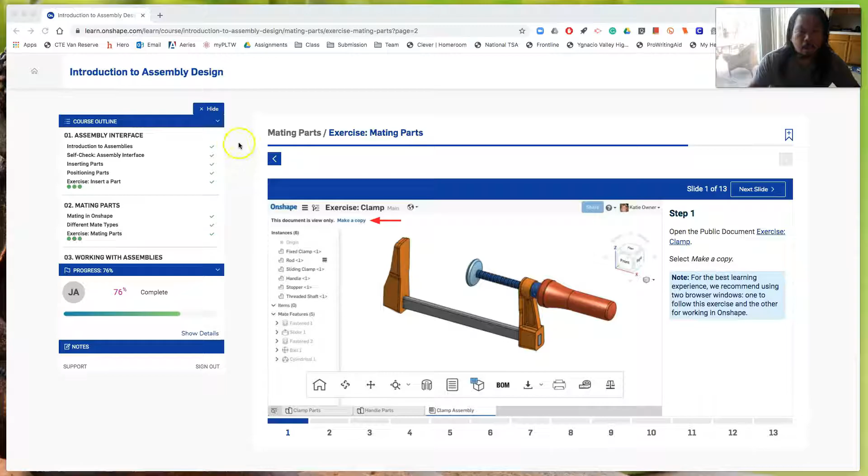Okay, so this lesson for today focuses on mating parts. In Autodesk Inventor, we call them constraints. Here in Onshape, it is so much easier than the way we did it before. There is a feature in Autodesk Inventor known as joints that is similar to this, and that's what they actually use for making assemblies.

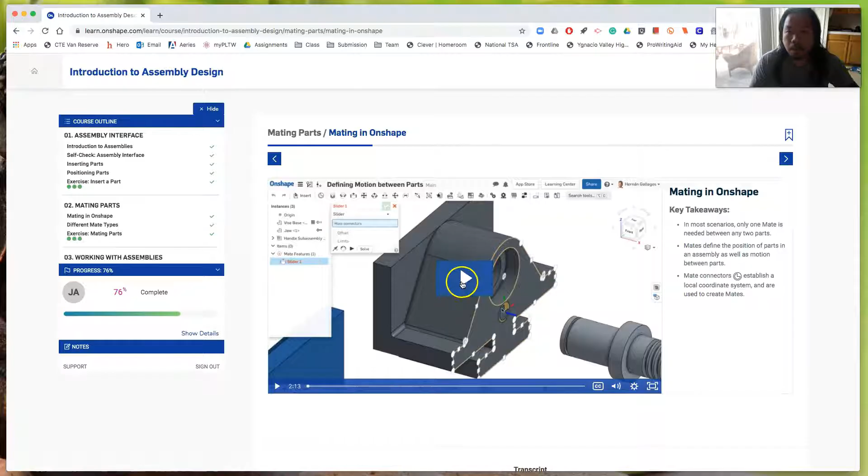So we've done all of these before. Now we're on number 2, mating parts. So first watch the videos. This will prove beneficial for you guys while you do the tutorial with me. And then also watch different mate types. And after you've done that, now go to the exercise mating parts.

Okay, so we are supposed to create an assembly with the parts from different part studios, and this is how it looks like. And then we're adding limits to mate so that the movement is constrained. It doesn't go past where it shouldn't.

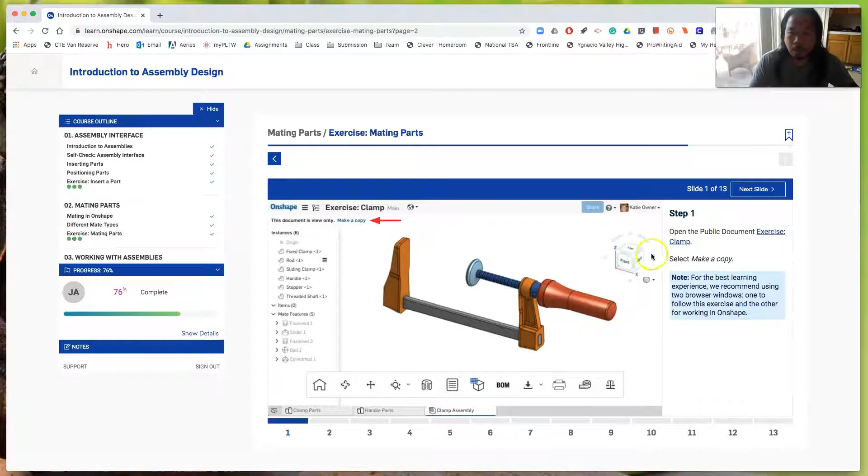Okay, so click on the next page. It says here, open the public document. So click here. And at this point, let's split the screen.

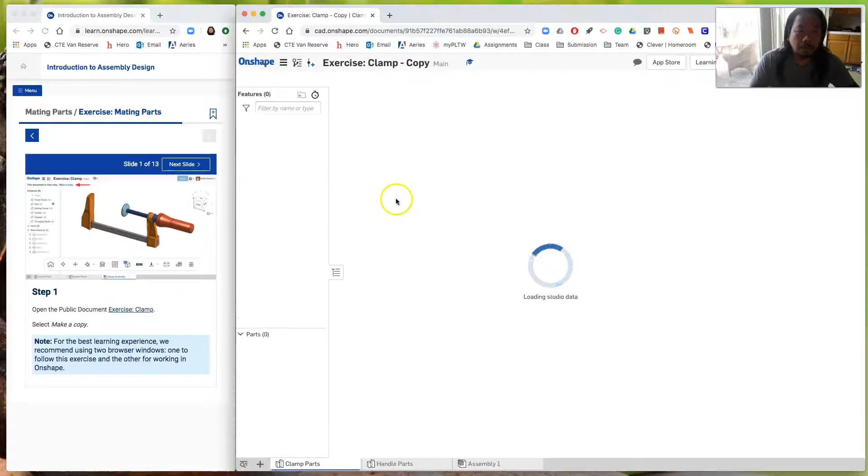And then what you need to do now is make a copy. So just leave it as such, exercise clamp copy. Click OK. And then the next slide says, navigate to the assembly tab, which is down here. And then right click on the tab to rename it. So right click, rename, and then we'll call it clamp assembly.

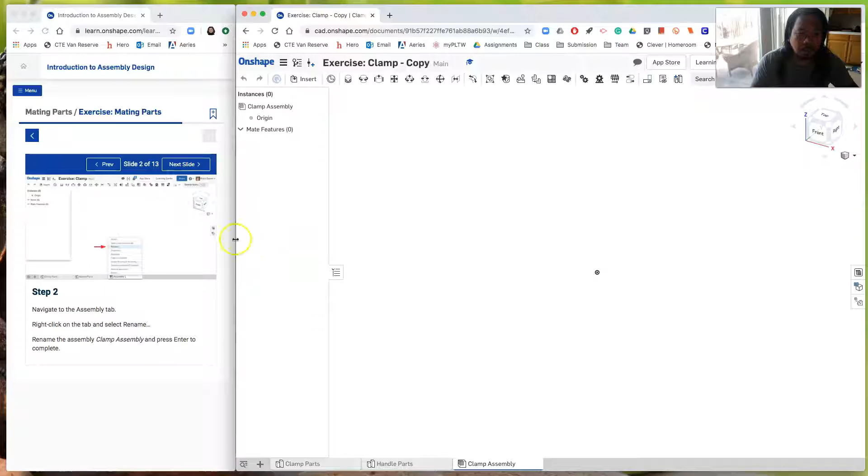And then click on it. And now we're going to start off with an empty graphics window. Okay, so first insert the parts from the clamp parts studio.

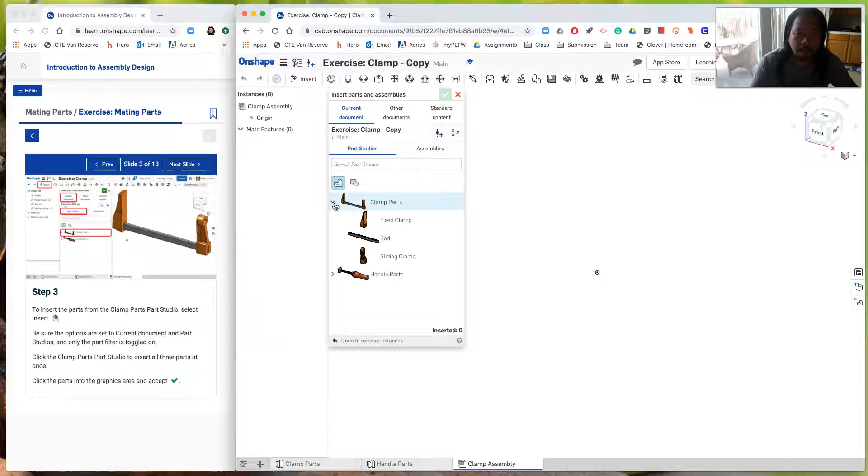So insert, and then there's two. There's clamp parts and then there's handle parts. And if you click here, the clamp parts, there's 3 different parts there. And handle parts, there's 3. So just click on clamp parts for now. And so as you can see, it's in the graphics window now. Just click on it so it gets dropped there, and then click on the check mark.

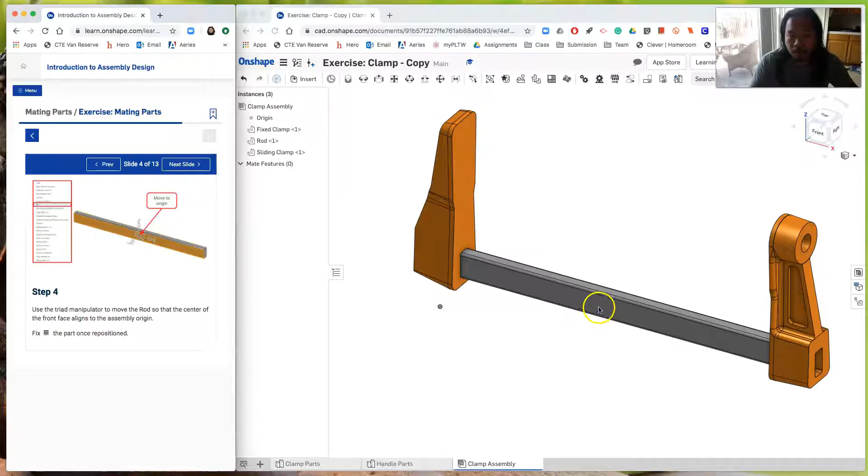Okay, next slide. We need to look for the triad manipulator on the rod. So there's 3 parts here. There's the fixed end, there's the sliding end, and then there's this rod. So click on the rod and then click one more time, and then you'll actually see the triad manipulator.

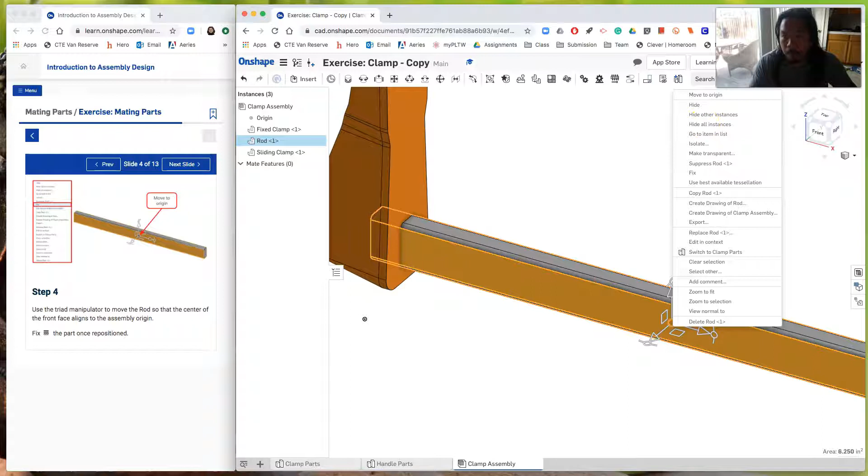There you go. And then once it's done there, right click on any part of the rod and then say fix. Okay, so now this won't move. Okay, so there's that grounded icon.

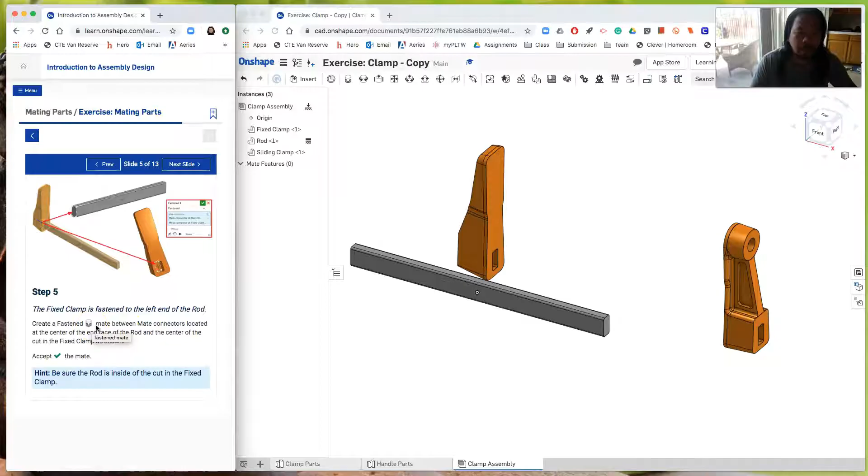So next slide, we are to put constraints now. Okay, and the first one that we're going to put is called a fastened mate. Okay, or not constraints, but they call it mate. So we're going to do a fastened mate, and the fastened mate, it's like gluing them together and they're not going to move at all. The 2 parts aren't going to move at all. So this is the fastened mate right here.

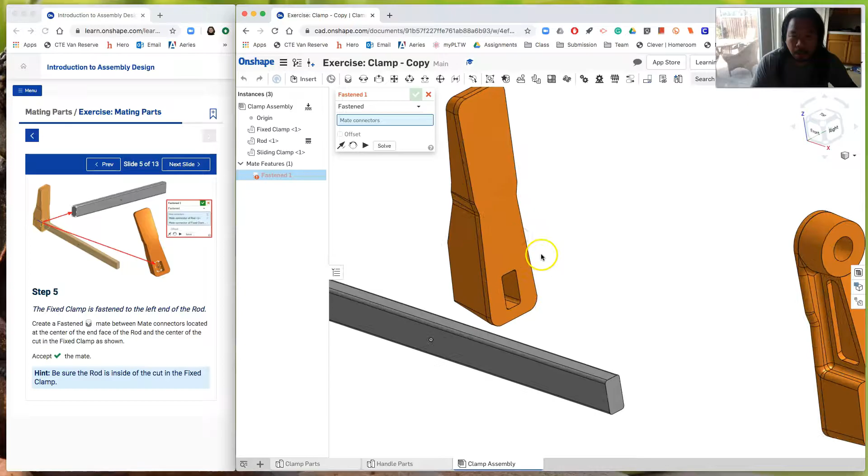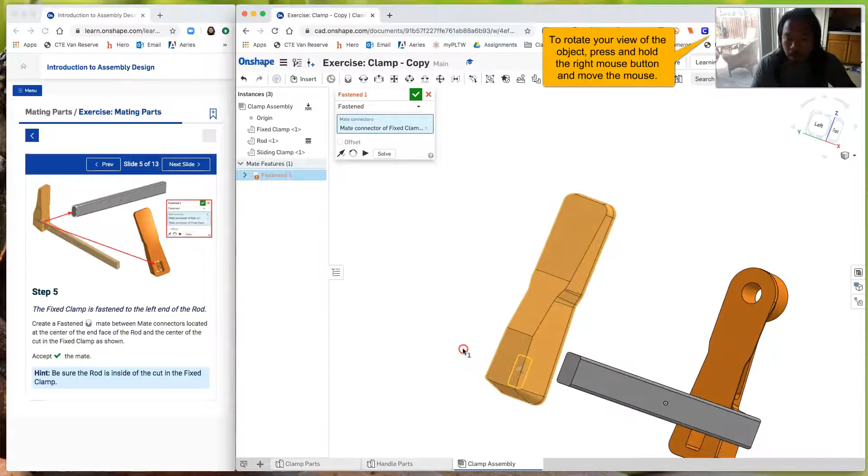And if you leave your mouse there, you'll actually see instructions on what you have to do. Okay, but it's simple. Just click, and then we are going to fasten this fixed end, and then try to go inside and then get that center of that rectangle from the inside. Okay, so right there, click there, and then right at the end, and I'm just right clicking and then pressing the right button and then moving it around to move around. Okay, and then right here, click there.

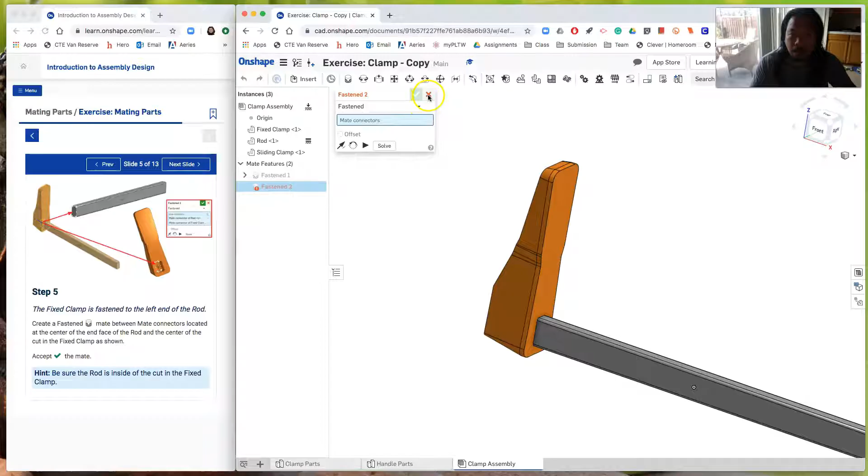Okay, and then you could solve it, or you could just click check. Okay, and then you will end up having this. It's assuming that you're going to do another fasten, but we're not, so just hit the X there. So as you can see, now if I try to drag this, it won't move. This one's grounded and this one is fixed to the rod, so it won't move at all.

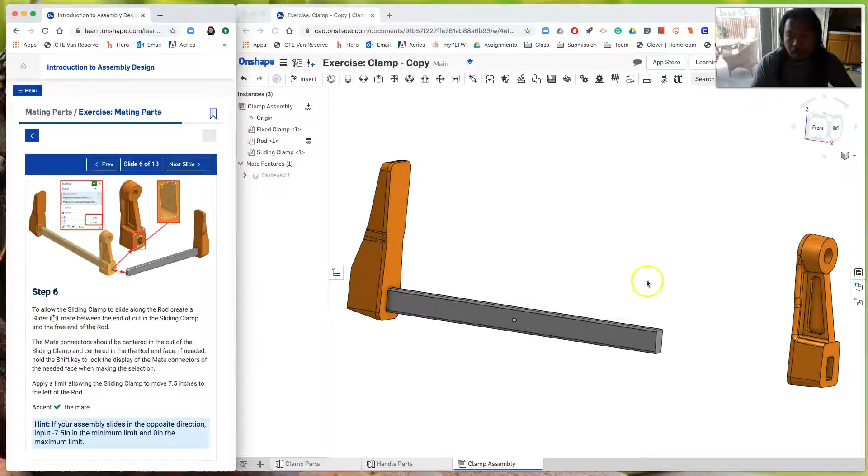Okay, so next, right click, zoom to fit. The next one is we're gonna put a sliding, a slider mate onto this too. Okay, the slider mate is this one. Okay, so click on the slider mate and then click here, this part of the rod.

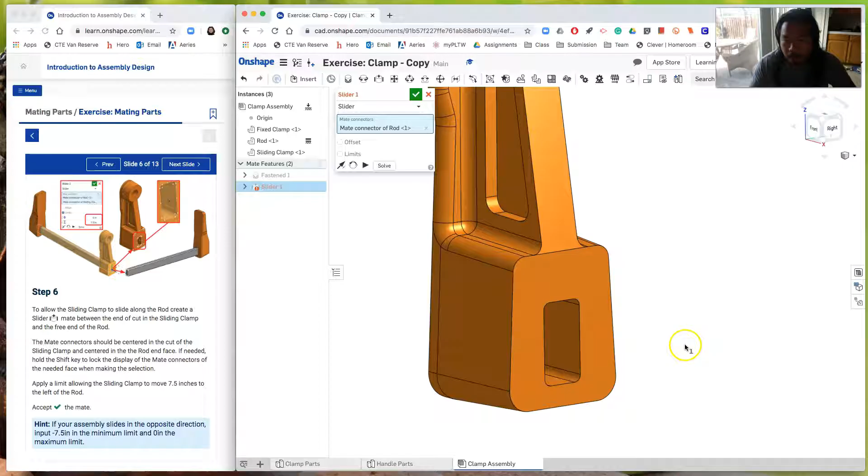Okay, and then right here, I'm just gonna look for this, the center of this rectangular hole right there, and then click check. Okay, so that solves it. And as you can see, it's there and it's supposed to slide. So let me zoom to fit. It's supposed to slide. There you go.

It does slide. But look, it goes past it though. Okay, it goes past the fixed end and goes past this end. So we have to do some edits on this one, and this is what we call as limits.

Okay, so the first limit that we have to put is, let's put 0 and let's see what happens. Okay, and let's try to click check and let's see what happens when it's 0. So there's that stop, so no movement to the end of the rod, but now we still have that problem.

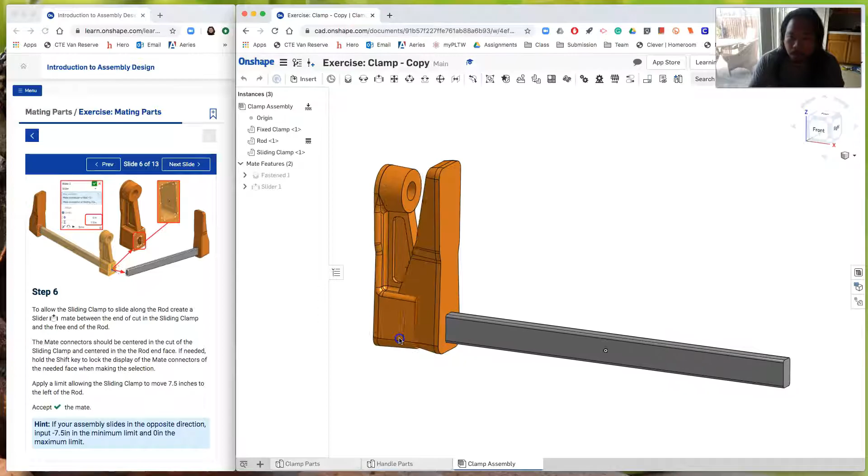Okay, so let's right click on the slider, edit. So 0, that means this and this, they're flush. Okay, and then we want the maximum travel to 7.5 inches. So type 7.5 and then check.

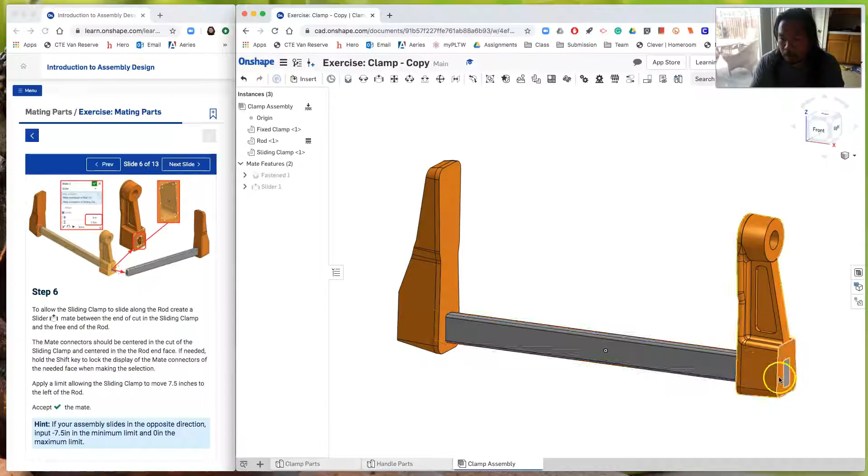So this end is going to travel 7.5 inches there. That's the maximum, so as you can see, it ends right there. So from here up to there is 7.5 inches.

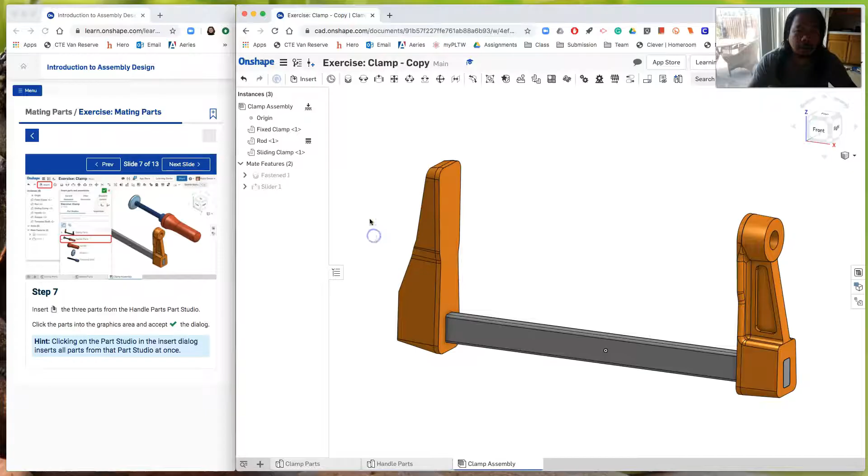Okay, so next, insert the 3 parts from the handle parts part studio. So insert, then current document, part studios, handle parts, then there it is, and then just click and check.

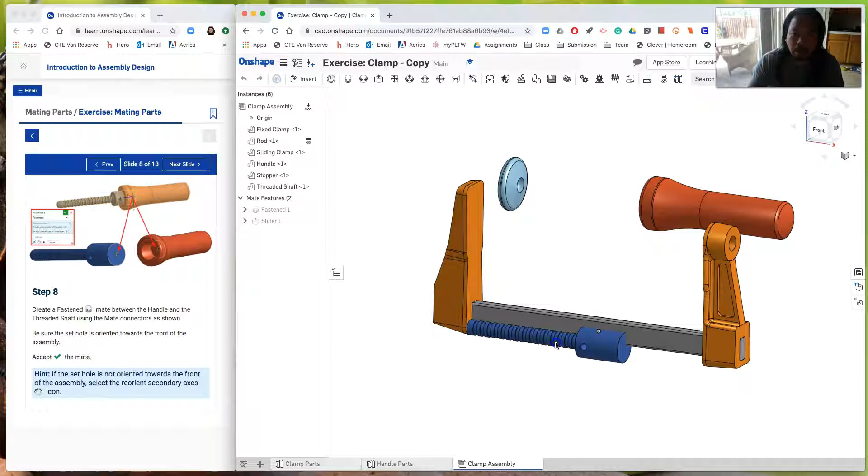Okay, next slide, we are supposed to separate these 3 components. First, we're supposed to put a fastened mate on the handle and also on this piece right here, the threaded part. So right here is the first one.

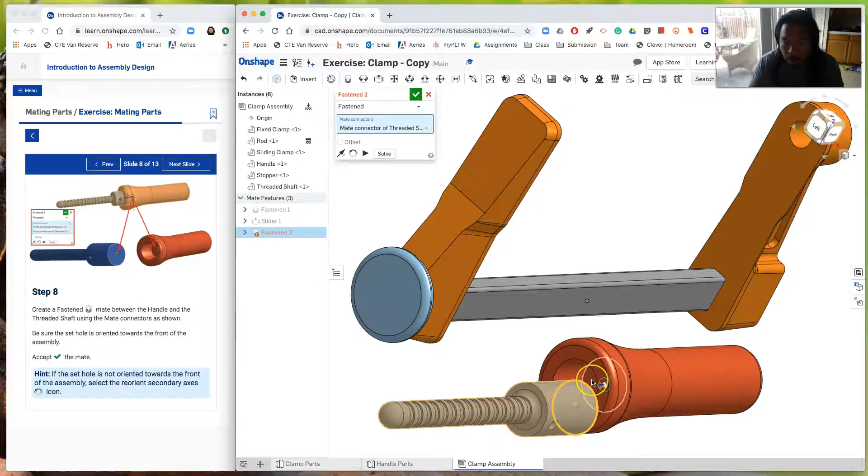I think I got that right there. Okay, so click check. So these 2 are together now, they're fastened.

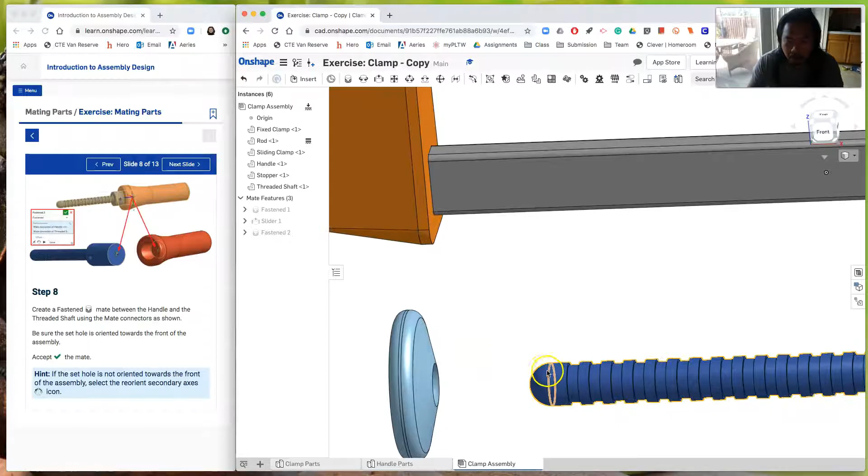And then this one, if you notice, this is a semicircle. So you got a concave end here, and then you have a convex end here. For this, it's called a ball and socket. So for your next one, we are going to put a ball mate.

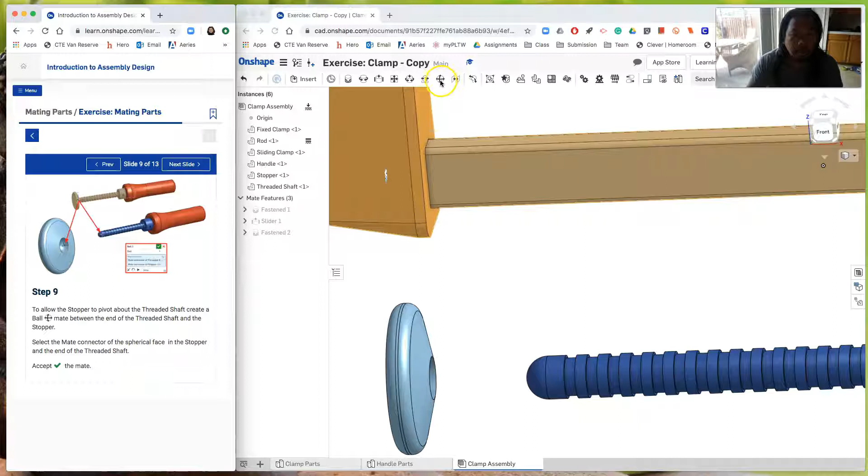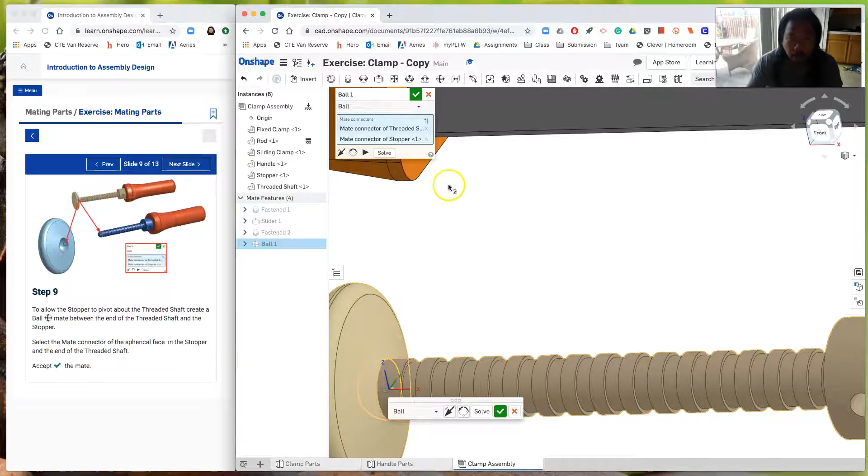Okay, so the ball mate is this one right here. So click on the ball mate and notice how I'm going to put it. You just have to select the tip of the ball right here, and then same thing here, the face, like so, and then hit check.

Okay, so the next part, you don't have to do it, because if I move this, everything moves together, including this one. But for you to actually see what it does, I'm going to fix this first.

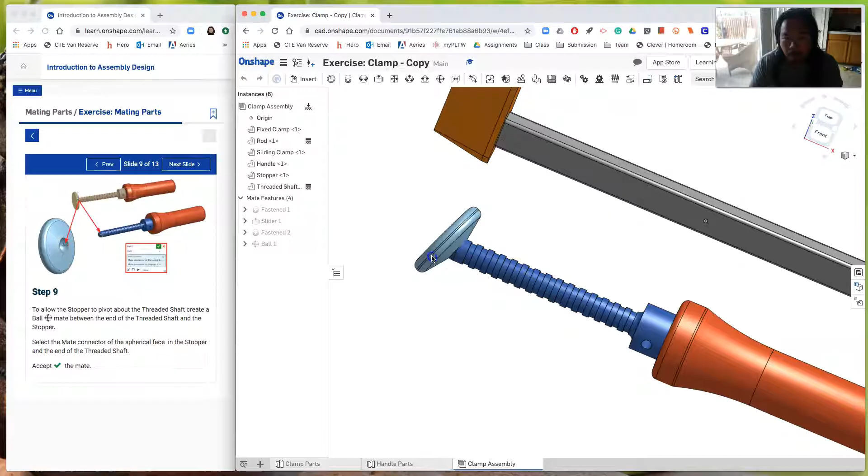So don't do this anymore. So this one's fixed, okay, so it can't move, but this one isn't. Here's the movement of the ball, so that's the movement of it.

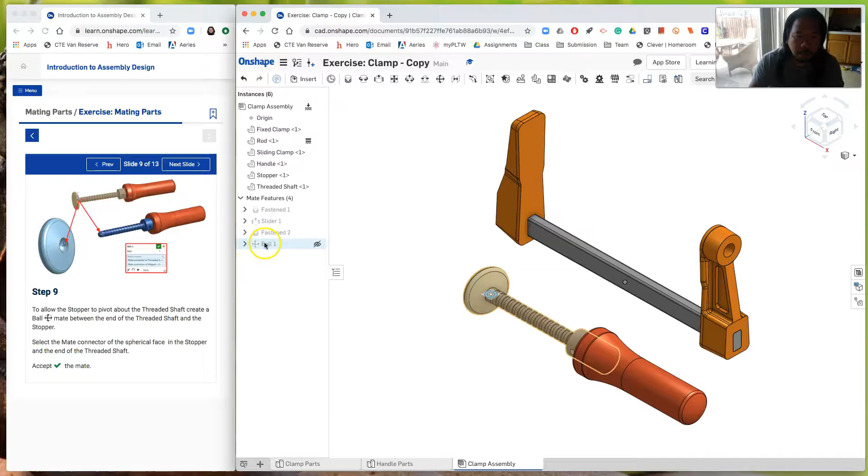Okay, so let me unfix this, and then let's go to the isometric view again. All right, okay, so there's the ball. I'm going to right click the ball here and say reset so that it's lined up nicely. Okay, so next slide.

Make the threaded shaft, this one, so it can slide and rotate with the cylindrical mate. And then we are putting it here. So if you look at the cylindrical mate, look at that. There's that arrow right there, and then there's that rotary arrows, which means it could go in and then it could also rotate in place.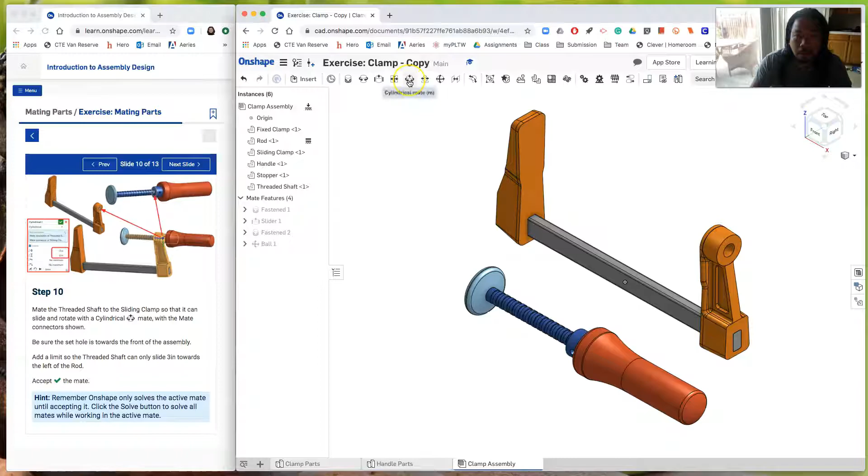So click on that. The first part would be, watch where I'm going to click. So here's that. Once you have these two circles highlighted, click. So we got that part right there.

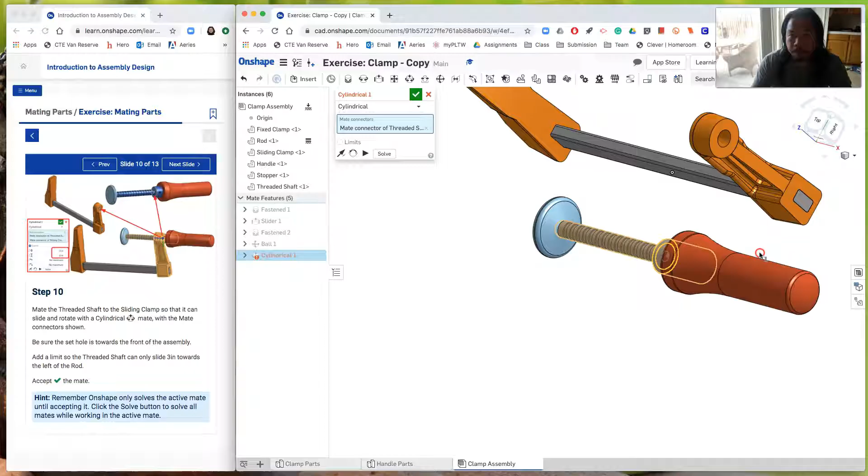And then on this part, it's this part of the circle, okay, the edge of the circle. Okay, let's click. There you go, okay.

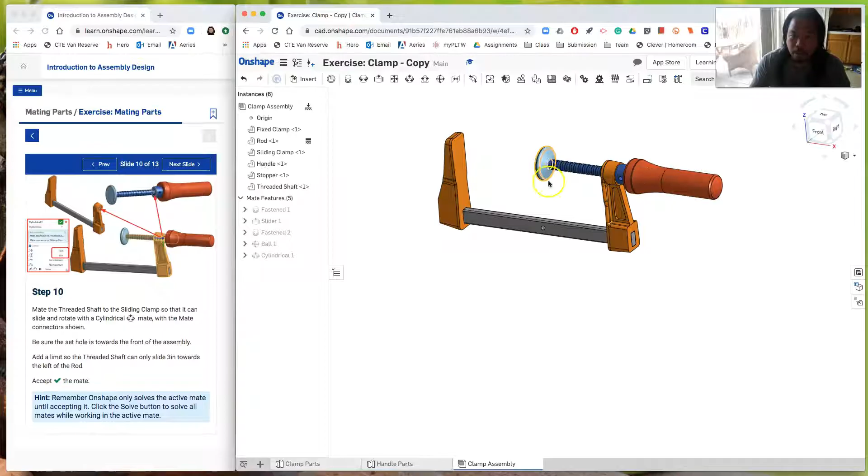So I was surprised there because it went there by itself, but these ones are fixed and this has a ball, so okay, so that worked. Okay, so let's see what it does now.

Watch what happens. Notice I could actually move it here, and then I could also watch this hole right there. I could also rotate it, okay? But then it goes past it though.

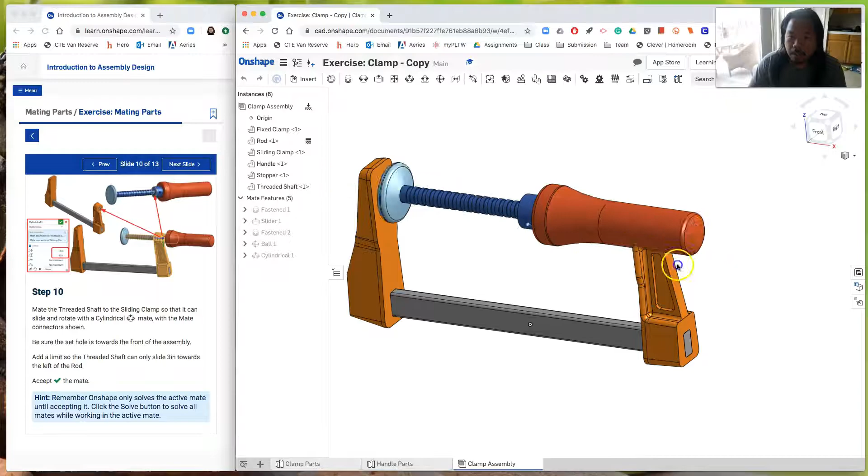Okay, so we need to modify the cylindrical. Click on edit, and then we need to click on some limits, okay? The first one is the maximum, okay? So let's put, what's a maximum? It's supposed to be 0, okay?

Let's click on that and let's see what happens. So see how that got connected there? So that's the maximum 0, and we should be able to pull it out.

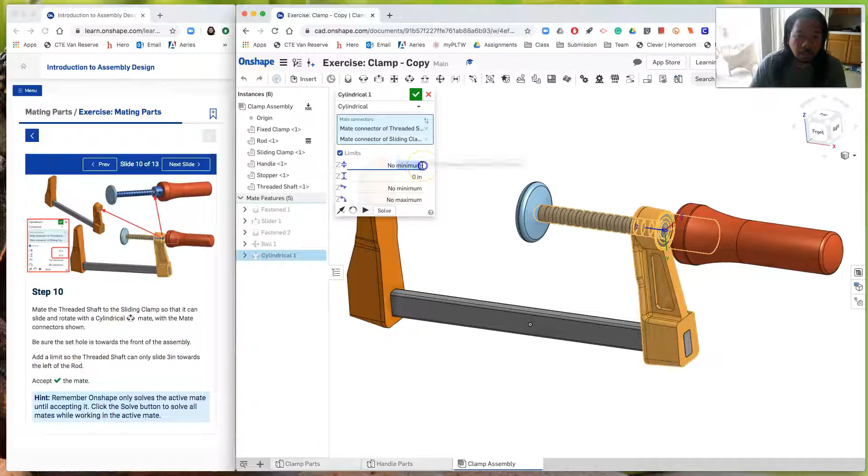And let's go click edit on the cylindrical again, and then this is supposed to be, it's going to the opposite direction, okay, to the right. So we're doing -3. This type of movement going inward is positive, but going out is the opposite, which is negative. So that's why we had to put -3.

So watch that. Okay, so there you go. So that's 0 inches, and then this is -3 inches.

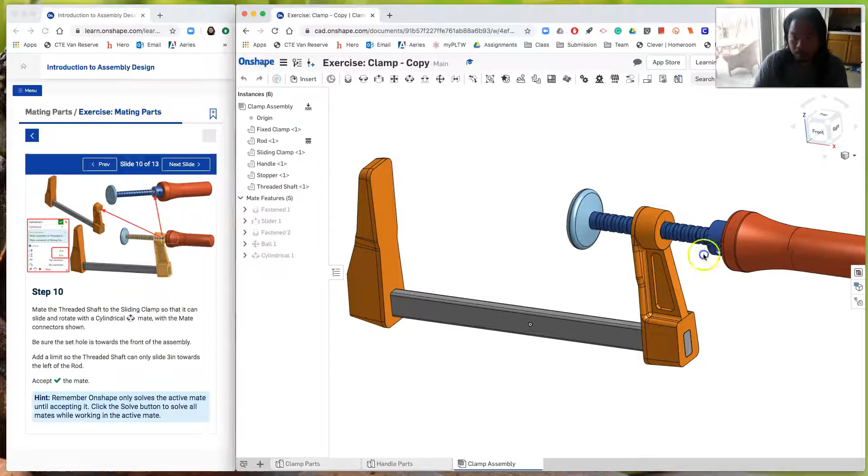Okay, next slide. Now let's try to drag the instances to see how they move. So if I click here and drag this, see how that passed through it, but then it drags that. Okay, so it works like a clamp. Cool, pretty neat.

So it doesn't slide there, but here. Okay, next. Now, you need to reset everything. After you're done playing it, you have to go click on the slider here, right click, and then reset it. Same thing with the ball, reset the ball, and then reset the cylindrical.

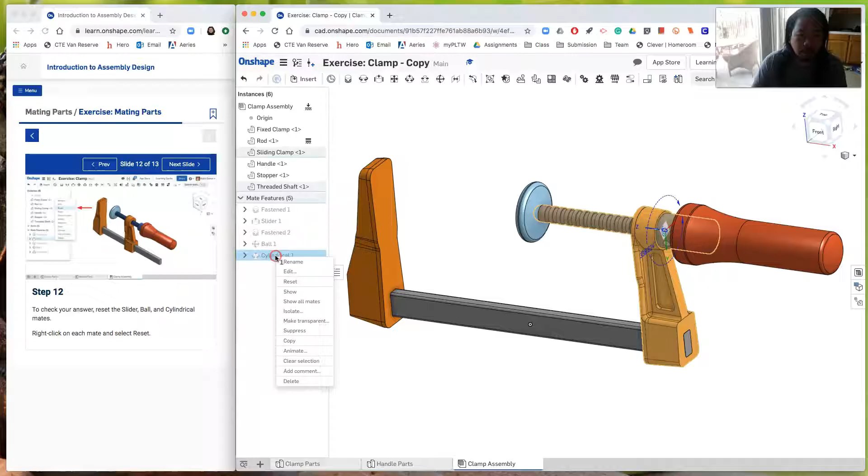Okay, so that you're all set to answer the question. Okay, so the next thing that you have to do is you have to click on all 6 parts. Let's click on isometric so we could just view it nicely.

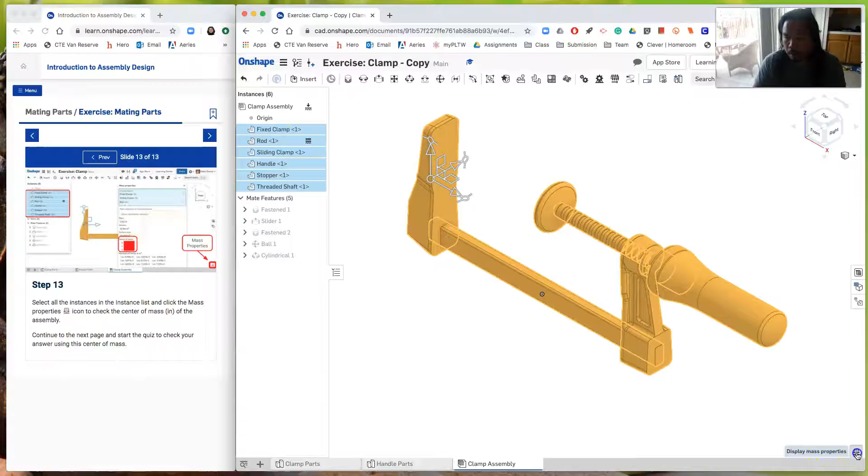And now with everything selected, let's click on display mass properties, and then you'll see the figures right here, center of mass, X, Y, and Z. Okay, you should have these numbers, okay?

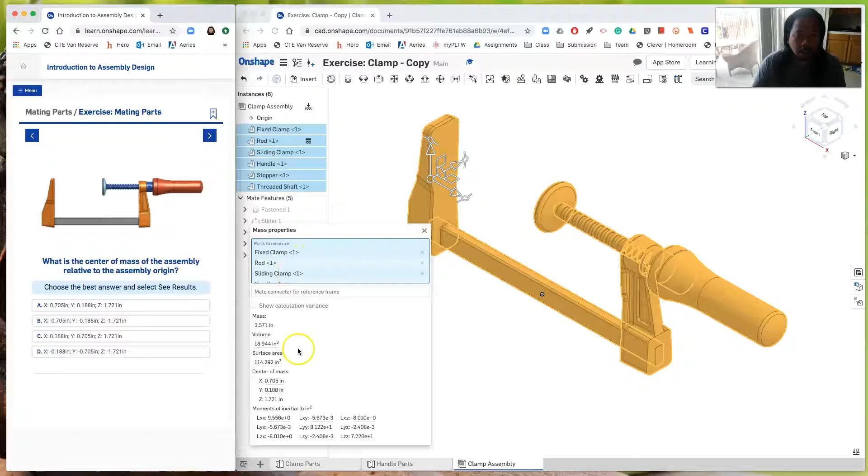And then click on next, begin the self-check, and then look for this number, which one it is, okay? These are the numbers that I need to see, by the way.

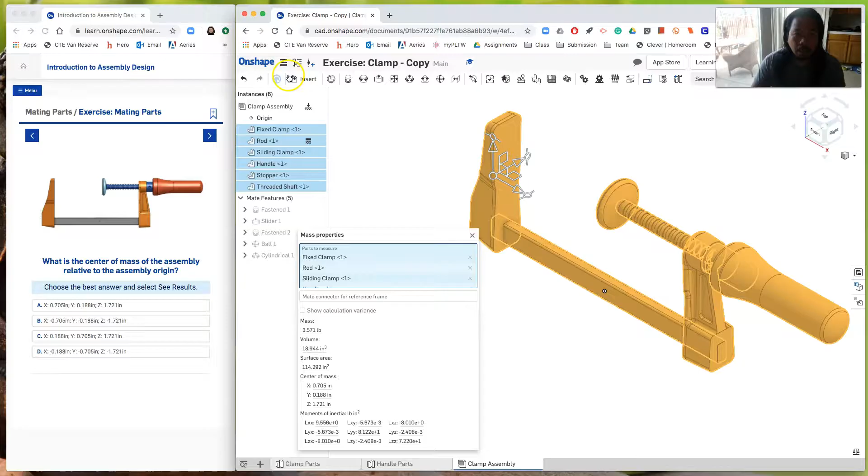So move things around, give some space, and then go ahead, take a screenshot. I need to see your name, I need to see the figure, and then I also need to see the mass properties. Okay, and then send that to me again, alvaricoj@mdusd.net. And then do not forget to close your document, it's already saved for you.